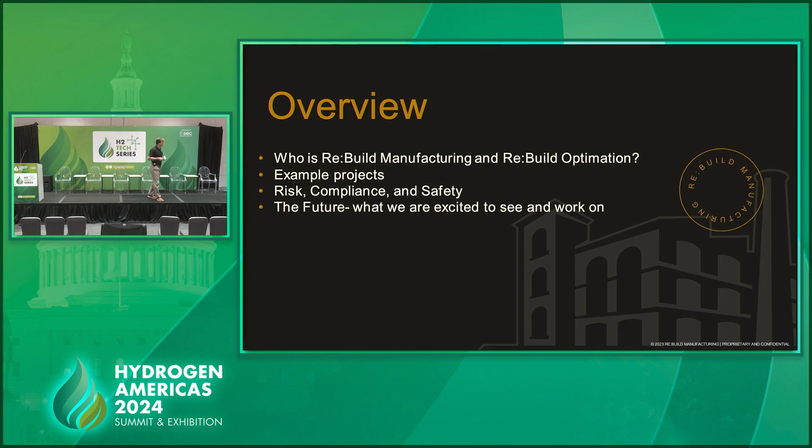In this talk, I'm going to introduce myself, Rebuild Manufacturing, and Rebuild Optimation, some companies I'm very proud to be a part of. We're going to go over some example projects, most within the hydrogen space, but some outside of it that still impact how you're doing things in hydrogen. I'm going to tie all of these together with risk, compliance, and safety. I'll be a broken record about this: the most successful projects we've seen have a very clear understanding and cohesive plan for how they handle risk, as an organization and on the micro scale within a project. Then, time permitting, a completely self-indulgent slide where I talk about what I'm excited about in the future.

So who is Rebuild Manufacturing? Rebuild Manufacturing is working to be the next great American manufacturing company. I'm extremely proud to be part of this company. They are reshoring manufacturing for all the ways it's left in the last few decades, and doing it in a way that's compatible with our best values. They empower the communities they're part of and the people that work for them. We have a full set of 16 values, but my favorite is that we invest in positive sum relationships. This allows me, when I work with a client, to be more transparent than the client is used to with vendors. I'm transparent about how I generate estimates because we're investing in a long-term relationship where we both win.

Rebuild Manufacturing is composed of about a dozen sister companies. I work for Rebuild Optimation, which for a few decades has been building skid-based systems and full chemical plant systems. We have about 50 engineers and designers and over 150 very skilled tradespeople, including pipe fitters, electricians, and journeymen. We have a UL control shop.

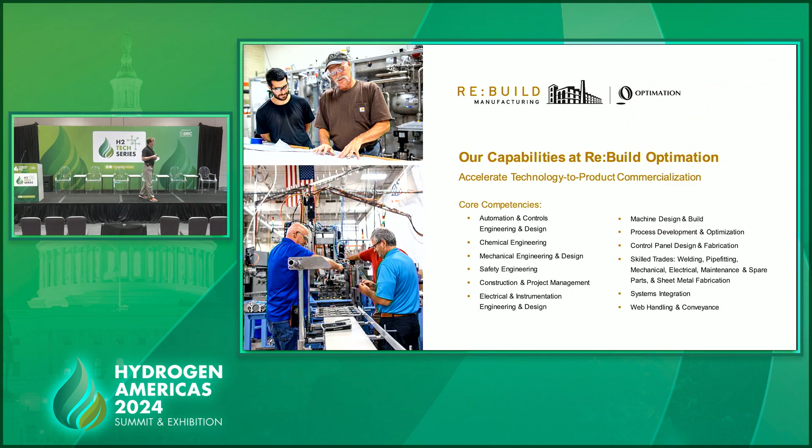To dive into what we actually do, I'll start with a high-level view of the hydrogen projects I've seen at Rebuild Optimation. We build test systems for fuel cells and electrolyzers, from the 1 kilowatt scale and rapidly approaching over 1 megawatt scale. Something I'm excited about, seeing all the presentations, is the scales of projects everyone's working on. We've also worked on hydrogen dispensing systems for transportation, storage, and trailers, and completed full risk, safety, and compliance assessments for clients. We have clients across entirely different technologies, from proton exchange membrane, anion exchange membrane, liquid electrolyzers, all the way to photocatalytic.

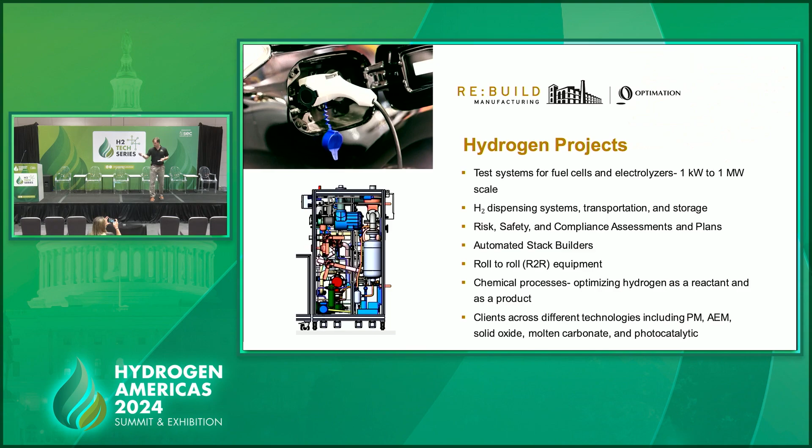When we joined Rebuild Manufacturing, our capabilities expanded. With AppliedLogix, DAPR, and Composite Resources, we're now able to work in composite vessels. We do full machine design for automated cell builds, and we also have full digital productization ability. AppliedLogix alone has over 50 patents related to digital productization of these systems.

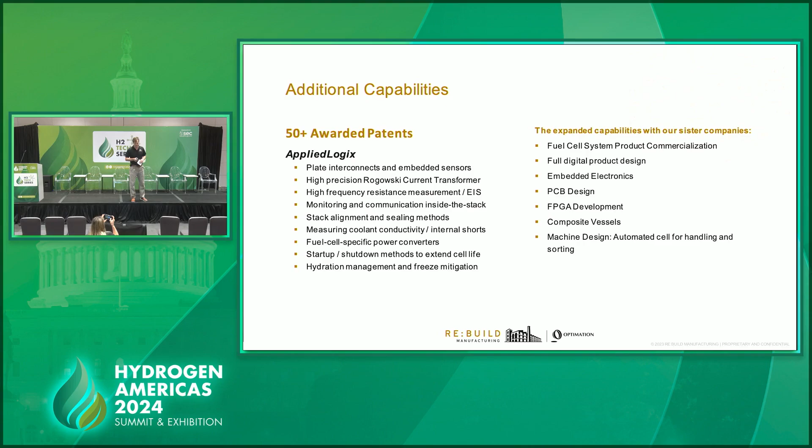I'm going to dive into specific projects now and look at the case studies. I start with high pressure test systems because these provided the tools that led to us making an impact in the hydrogen world. These test systems test pressures over 40,000 PSI, for aerospace clients, deep sea clients, and major oil and gas companies. As you can imagine, these are really dangerous. That was one of the core skills: how do you take a risk approach to make these projects successful? In addition, having a full supply chain, understanding who the vendors are for different valves, compressors, and other components.

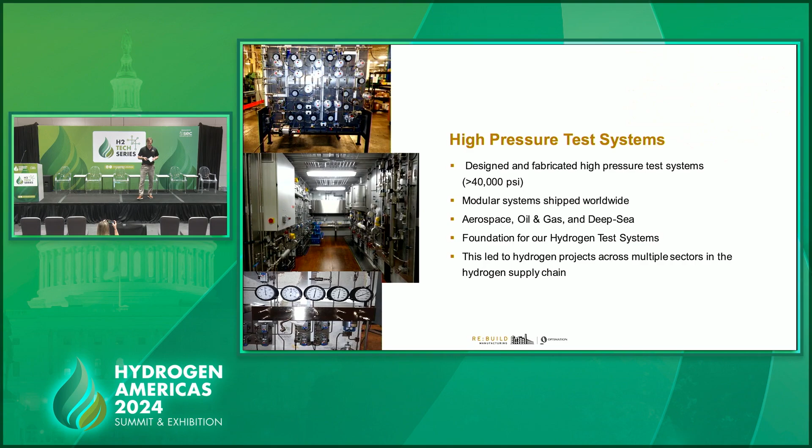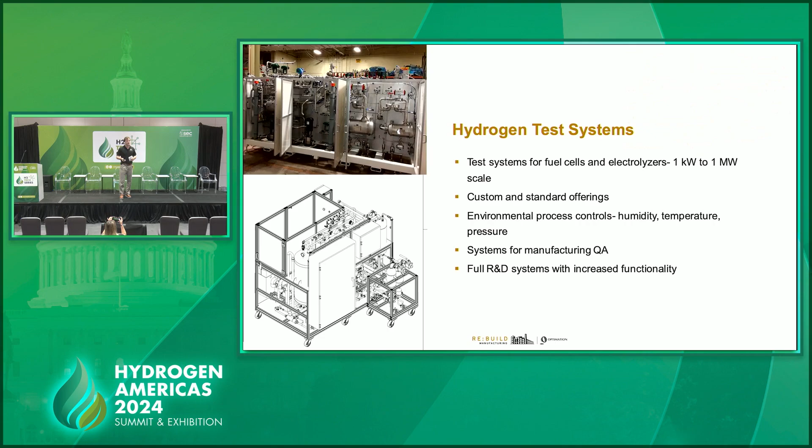This led to hydrogen test systems. As I mentioned, we're rapidly approaching over 1 megawatt test systems, with custom and standard offerings. In the past, my elevator pitch for Optimation technology was: if you have a custom or difficult system, we could engineer, design, and build it all in our one facility, with our own engineers and pipe fitters, going from an idea on paper all the way to a full delivered product. Now that elevator pitch has expanded: if you needed to build hundreds or thousands of systems, or needed to build a factory to build these systems, you'd be able to do that with our sister company capabilities.

So another case study diving in is hydrogen dispensing and fueling. These are complex projects. We have played a role in these projects at each different stage, whether that was early on in the design, helping develop PFDs into full P&IDs for a client, or if we were replacing a specific component, like upgrading which compressor system you're using, or upgrading which pressure regulators you're using for higher reliability.

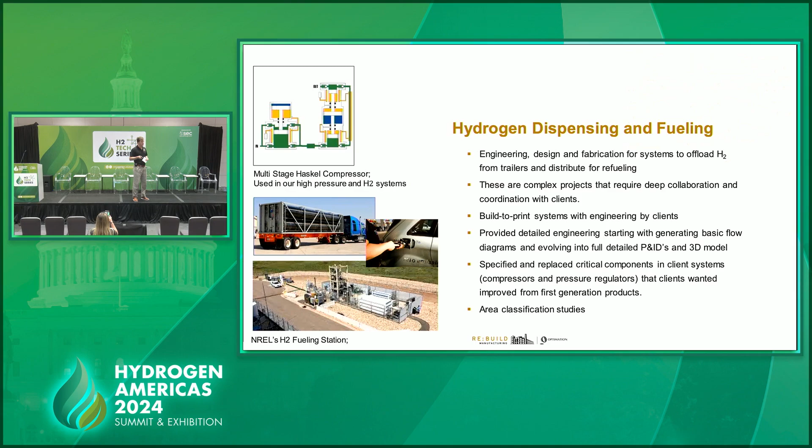The one area that we've added significant value, and I'll talk about this more, is we've taken a look at existing designs that are in a market like the European market, completed an area classification study, and then a sophisticated client would be able to use that to upgrade their product design so that they're compatible to work in specific jurisdictions in the United States.

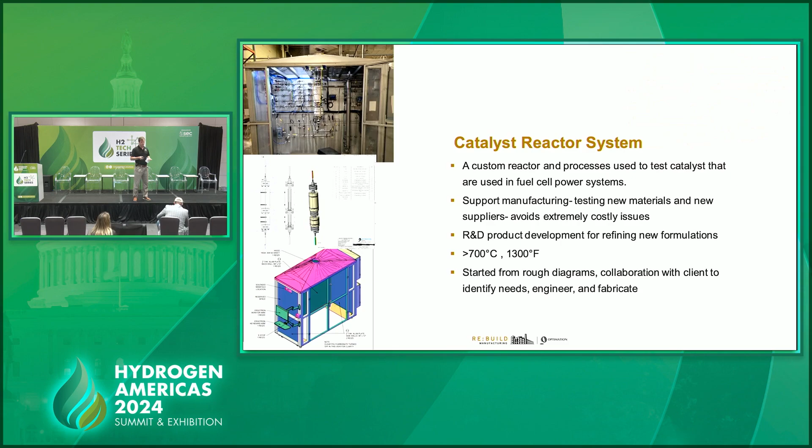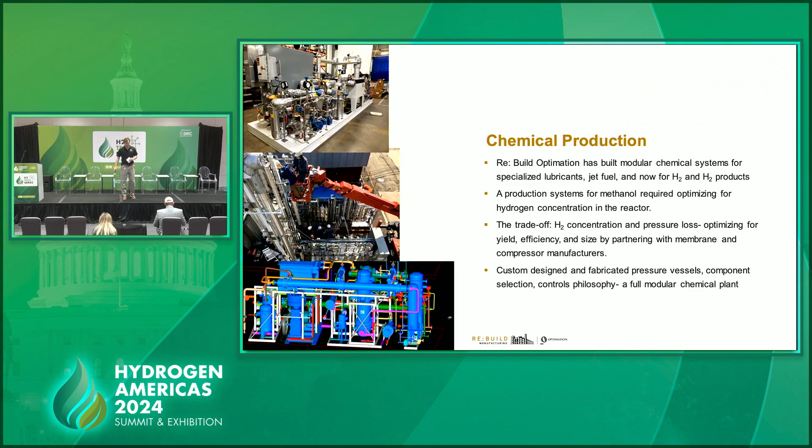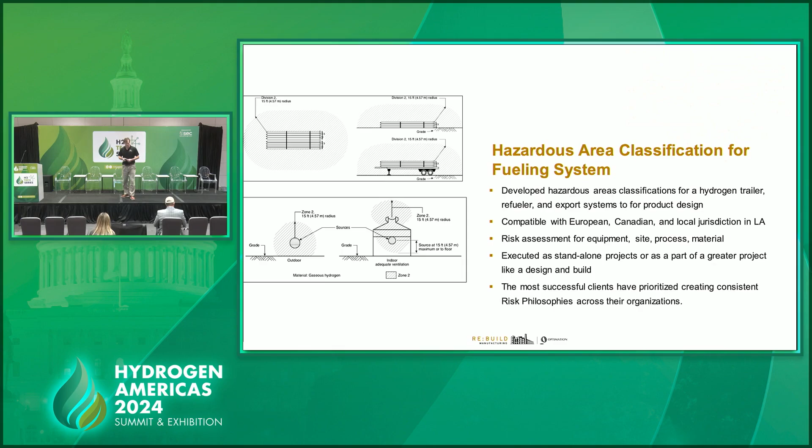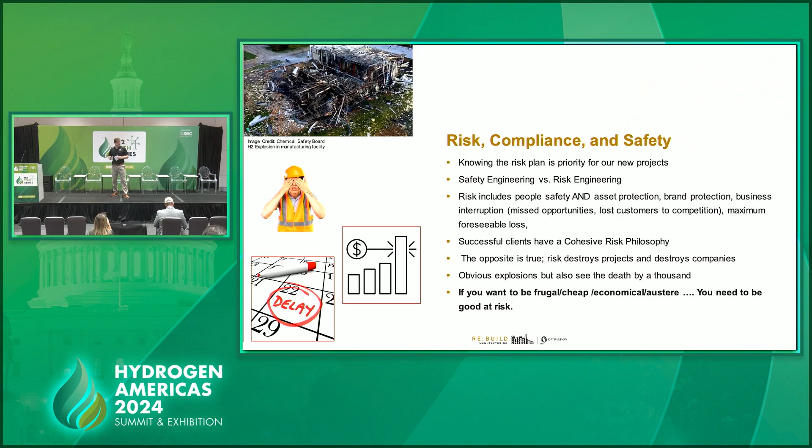So if you want to be frugal, if you want to be cheap, and if you want to be efficient with your systems, you need to be good at risk. We do have a few litmus test questions. I hope that you'll come talk to us at our booth after this and discuss that with us more.

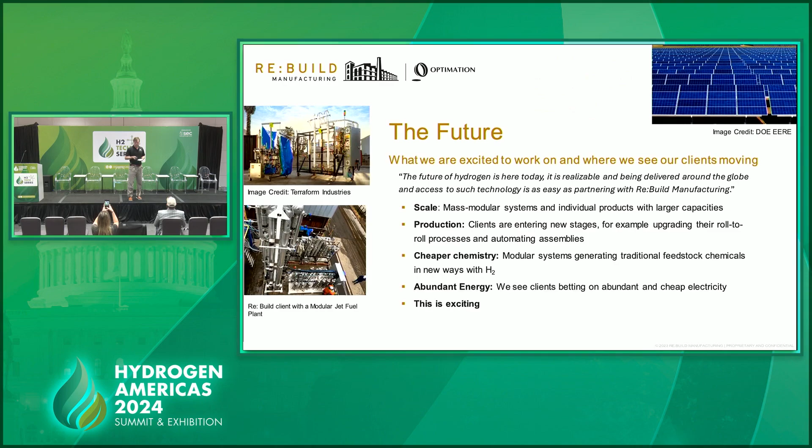I've enjoyed this conference very much. This is the first time, the longest I've talked about hydrogen without anybody bringing up a Zeppelin. Actually, I had a neighbor yesterday - I kid you not, this last weekend I had to explain how this is different than a hydrogen bomb. So it's a lot of fun being able to talk with everyone. Thank you.

Go ahead, sir. Was that hydrogen buildup in the roof, was that Fukushima? I don't think that was Fukushima, that was somewhere in the Midwest. I took that from the Chemical Safety Board. So it was actually not a hydrogen plant - they were making, I believe, a polymer of some kind. So they weren't set up for hydrogen production, and they didn't have the appropriate ventilation, and they didn't do the appropriate risk assessment that I'm sure all of you would, knowing what to do with hydrogen.